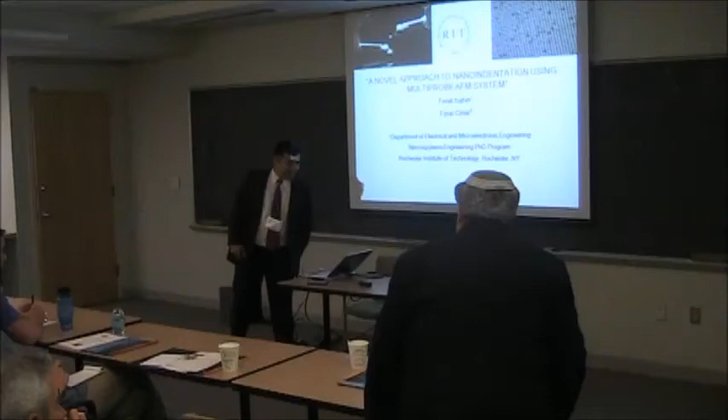The title says a novel approach to nanoindentation using a Multiprobe system. It's novel in the sense that we're using two probes to measure two different things: one being force, one being distance.

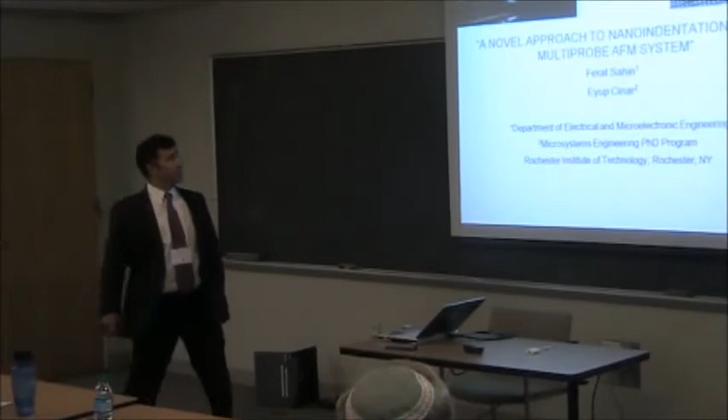I put those two pictures up there to show why we're doing this before I get into details. What you see is a bunch of cancer cells on top of PDMS pillars, which are 5 micron diameter and about 20 micron tall, so about an aspect ratio of 4. The reason the cancer cells are up there is that when they are in invasive mode, it's known that their traction forces are much higher than normal cells. So our idea is to measure, by looking at the dynamic change or how much they pull those pillars, the forces those cells create on the surface, and thus how invasive they are.

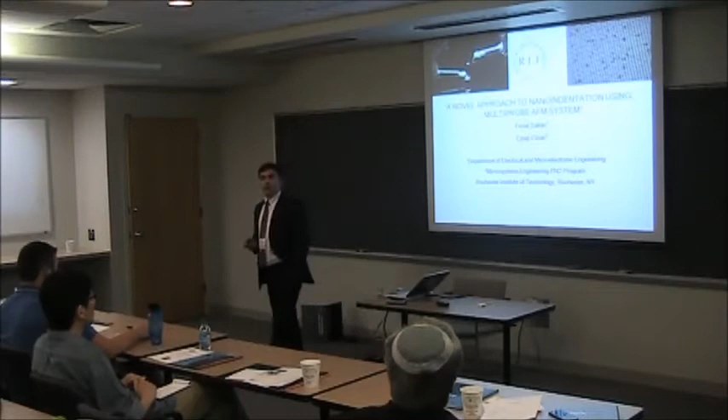That was the starting point for us to go into PDMS and figure out how we can quantify that force. On the left is the multiprobe system we have, the Multiview 4000. There is a tuning fork with a diamond indenter attached, and another probe which has a regular AFM probe touching the top of the diamond. What we do is move the diamond down and indent, and while this is fixed, we move the stage up and try to measure any change of the diamond, so we can get the X change or Z change, but in the force calculation, the X change.

So for that, we need to know the Young's modulus of the PDMS so that I can look at the deflection of the PDMS pillar and calculate the force. But the Young's modulus of PDMS in pillar format, with a high aspect ratio, may be, or in fact we believe will be, different than the bulk parameter Young's modulus. That's why we want to measure that through nanoindentation.

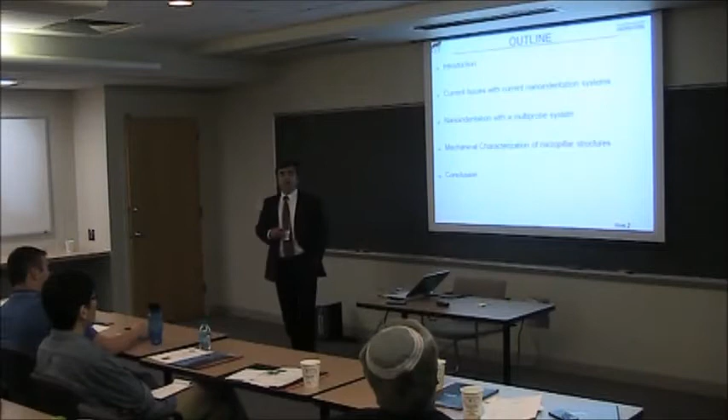Regular nanoindentation tools, as Aaron was saying, use AFM cantilevers. There are so many problems with them, so we had this tool in-house at RIT and wanted to make use of it so we could do a better characterization.

So, after that, Kit touched upon how AFM tips are not good for nanoindentation. And obviously there are models - this is the Oliver-Pharr model that he showed. What you do is indent on a material, pull it back slowly, and look at how much you can get in, which is the H max.

At that point, you measure the maximum force, and then slowly pull it back, and now you see the slope. The slope gives you the stiffness. Then at the end, if you have plastic deformation, you have HF, which through the force calculation will affect your Young's modulus.

That was the main idea we were pursuing. In Kit's case, he used PDMS as a standard component to measure the Young's modulus with different methods.

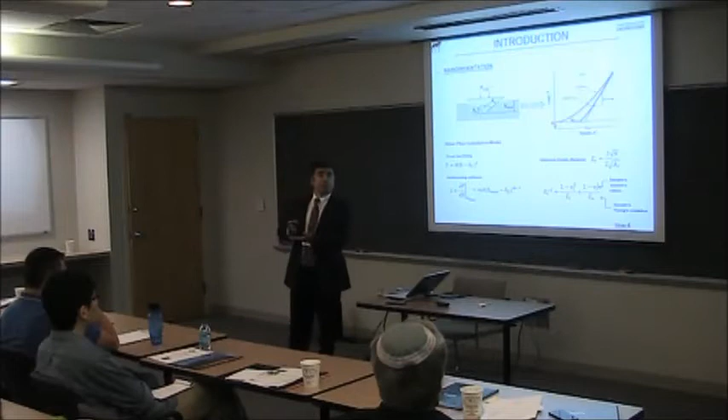In our case, PDMS is our only material, but we don't want to tune our system on PDMS alone. We want other materials with known Young's moduli, so the force calculations we get from the machine are more reasonable, correct, and dependable. Then we can apply that system to the PDMS.

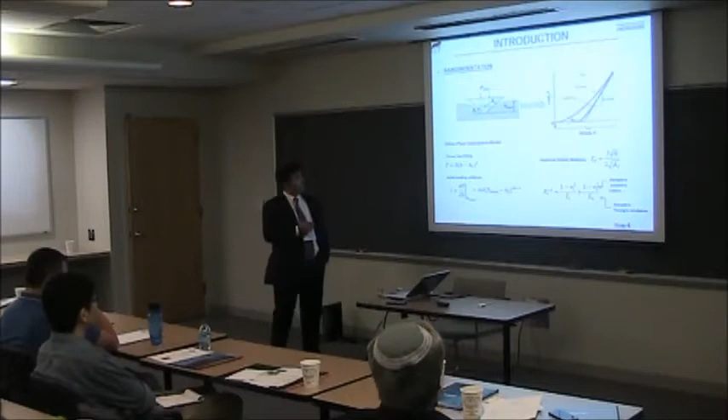Thus we did silicon, and then indented with the diamond probe on top of silicon, creating indentations and calculating that - so that's hard materials. Generally, Oliver-Pharr can be used for hard or soft materials, but it's mostly good if you have plastic deformation. If you have no plastic deformation, you're in the elastic regime.

There are known methods for that, as Kit mentioned in the morning. Why is nanoindentation being done these days? Mostly cytoindentation, a lot of tissue work - someone in the morning mentioned, actually Kit mentioned, mice, the aorta, yeah.

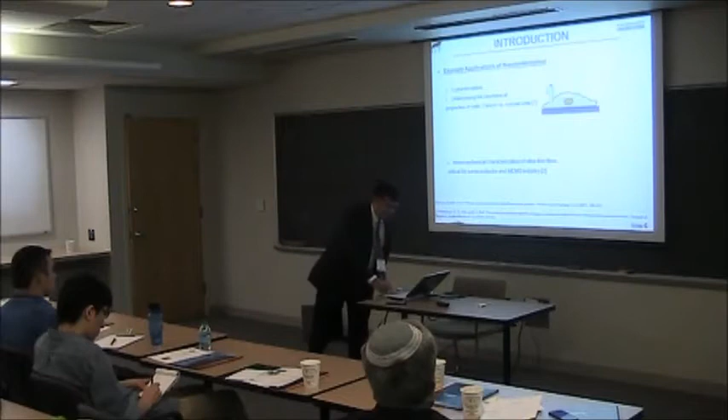Most biological materials, we don't know how stiff they are, we don't know their properties. But if we can measure their properties while healthy, and then measure when they are not healthy, this could become a detection method instead of just measuring the stiffness of the blood cell or the aorta. Also, thin films and ultra thin films are used a lot for nanoindentation for mechanical characterization.

Our earlier works in 2003 and 2004 were on bilayer cantilevers, where we had a very thin layer of silicon dioxide and also a very thin layer of aluminum on it, so we could create cantilevers where you can excite and change the curling.

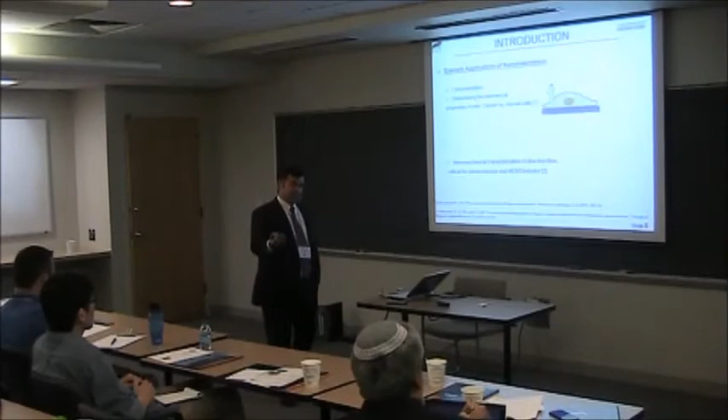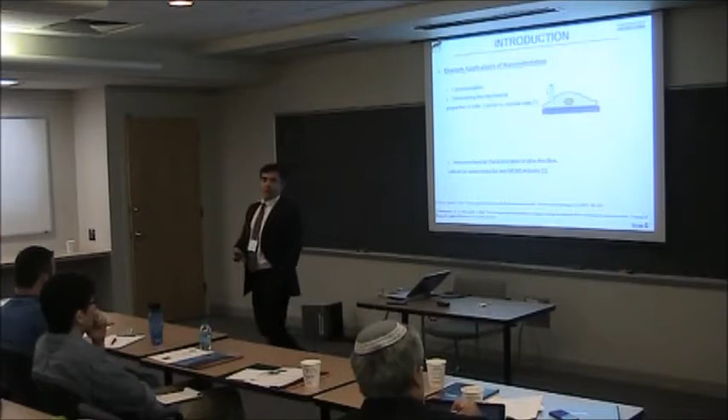Dislocations are very key in ultra-thin films. Because of dislocations, their Young's modulus is different, so you cannot just take the bulk modulus. That's why we actually work on the characterization of those thin films.

Briefly, as Aaron and Keith mentioned, there are AFM cantilevers used for nanoindentation. The main problem is snap-on and pull-off instabilities, where you touch and release and you get shaking. Obviously you have oscillation, bending errors if the AFM cantilever bends. Another problem is when you're pushing down, it's not just going down in that direction, it also moves in the other direction, which you don't necessarily count. So those are the things that are generally problematic in those probes.

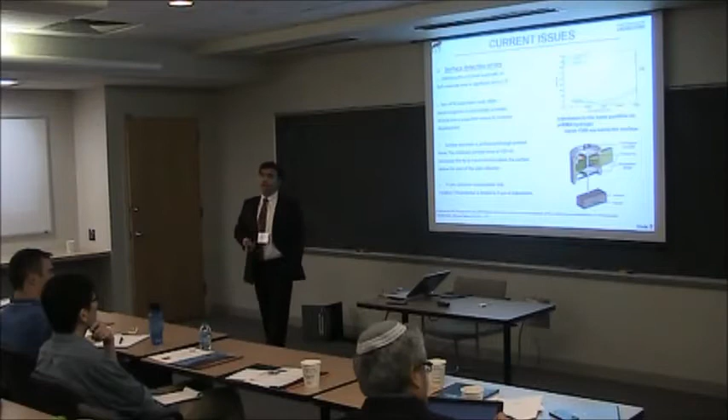There are non-AFM methods as well, where you have mechanisms to apply force and also measure the force. But then the problem with these is the contact point, the z equal to 0 point, is not clear. If it's not clear, then your experiments are not repeatable.

So we want to make sure our system is producing good force calculations through the indentation probe, and also getting good distance measurements from the AFM probe. For that, Aaron, Andre, Hisham and I all got together. We had the system set up on a sample. We put the probe here to see if the stage is moving correctly, and then we put the AFM probe on top, and we did indentation on silicon.

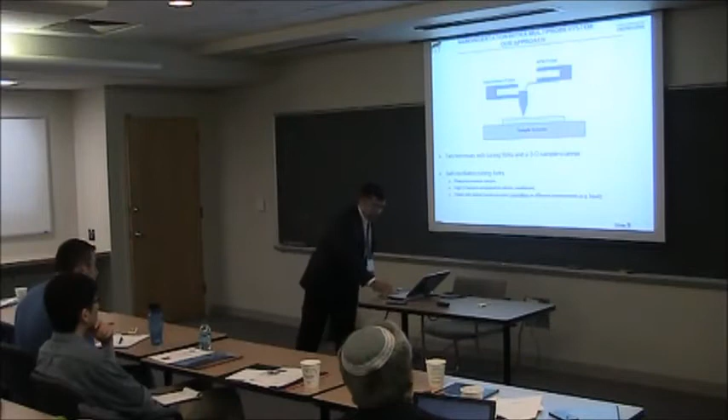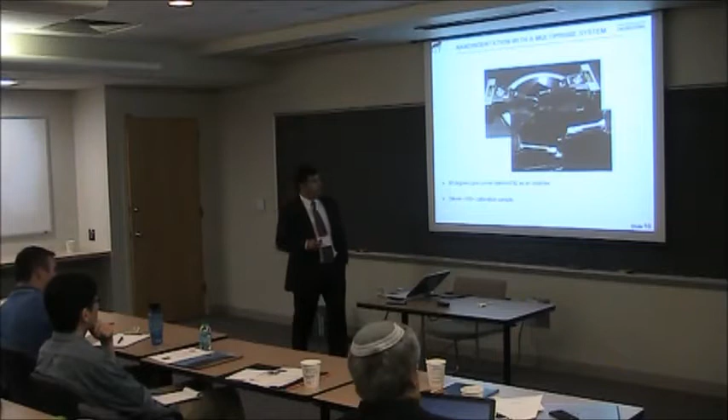We actually got good results initially on this system. It's hard to see, but this is the diamond probe, and that's the AFM probe on top of the diamond probe. We used silicon, which has the 100 orientation, and the diamond probe is a 90-degree cube corner diamond indenter. Now here's what we got from our initial measurements.

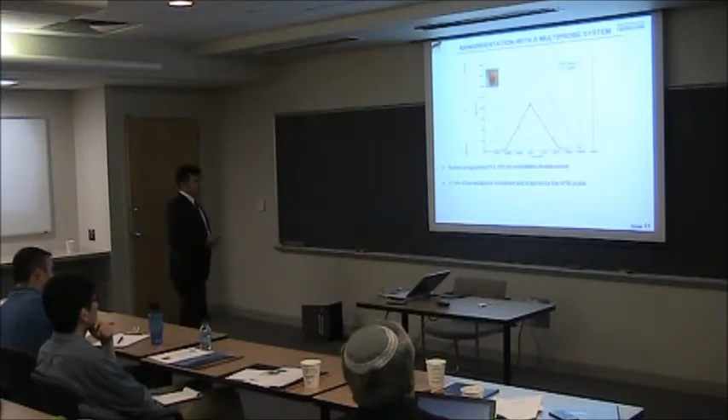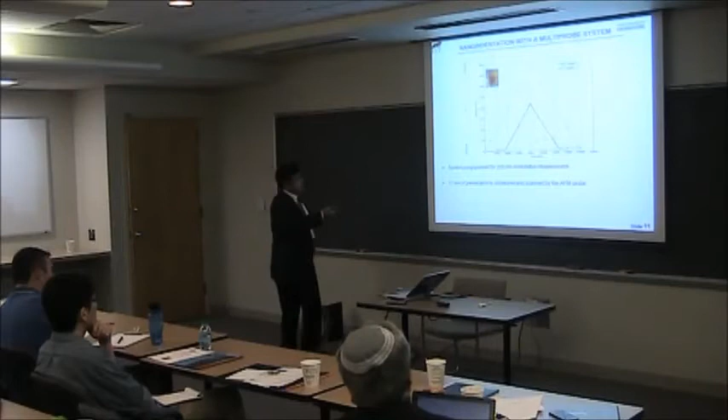This red line, it says 0 to 200, but I put these just to make sure. What happens is you go down first 200 nanometers, then go up until you touch the diamond, then push the diamond up about 200 nanometers. This is the stage value, so 0 to 400 nanometers. In the actual physical world, this is minus 200 nanometers to 200 nanometers.

The blue line, on the other hand, is the tip on top of the diamond, measuring the displacement. It's 0 here because the stage didn't touch the diamond yet, and as soon as it touches the diamond, it starts moving up, around 200, and then going down. If there is plastic deformation, that may not be 200, it would be less. Then once we go down and still measure, you can actually read some value for Hf before even scanning your indentation.

While doing the indentation on a known sample, if I can make sure that this force reading is accurate enough, then while measuring the actual displacement, I may use the Oliver-Pharr model a lot better, or other models, using the force value and the displacement, rather than just depending on whatever I read.

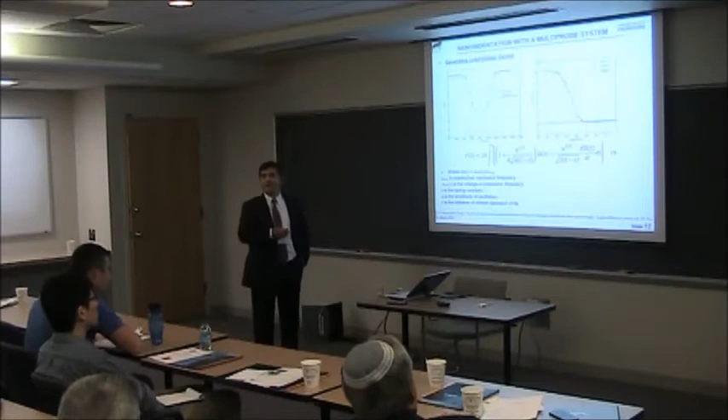Well, we were able to actually indent up to 10 nanometers, and the values we got are about 30 micronewton level, similar to the previous one, about 30 here, which is about 10 micron too. So we could only simulate this part because of computational limitations. Everything was so far so good.

Then we went to soft materials, which we really wanted to do because we want to find out how we can accurately measure the Young's modulus of PDMS. We couldn't use diamond because diamond would just go through the PDMS, so we wanted to use conical glass probes, just like Kit used, his was a 20 nanometer tip. Ours is 15 nanometers.

It's the same tip diameter as the diamond probe. We had issues getting the system stabilized because we were using the same setups we used for the diamond probe. We finally stabilized it and had some measurements, but the values we got weren't as good. We figured out that this tip was actually very sharp for our PDMS, almost like dipping in water and coming out, so it wasn't really detecting the PDMS.

So now we are in the process of hopefully getting new probes from Nanonics, almost spherical or conical but with a larger diameter, so that we can indent the PDMS, repeat the multi-probe measurements, and hopefully get the actual Young's modulus.

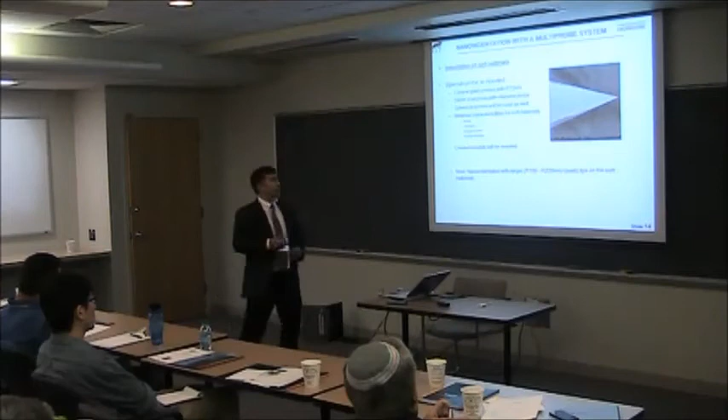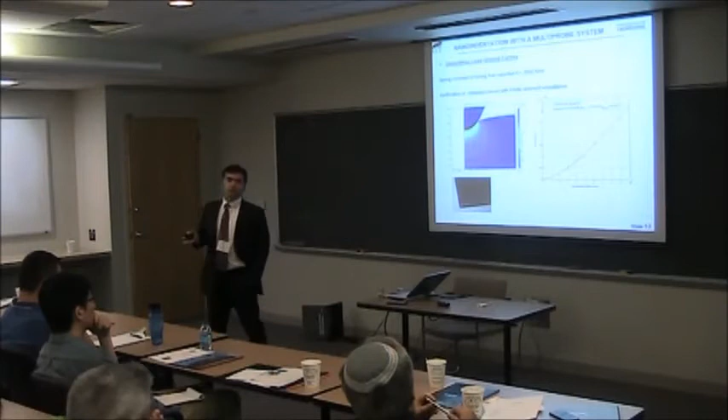So the spring constant was an issue, and we shared that with Nanonics. Now we're working to make sure this is right in the software as well. One last thing: we are getting a new tip or setup where the spring constant is higher, about 7,000. With this higher spring constant and the tuning forks, we're hoping that when we do nanoindentation on silicon, we'll get nicer graphs and nicer force readings.

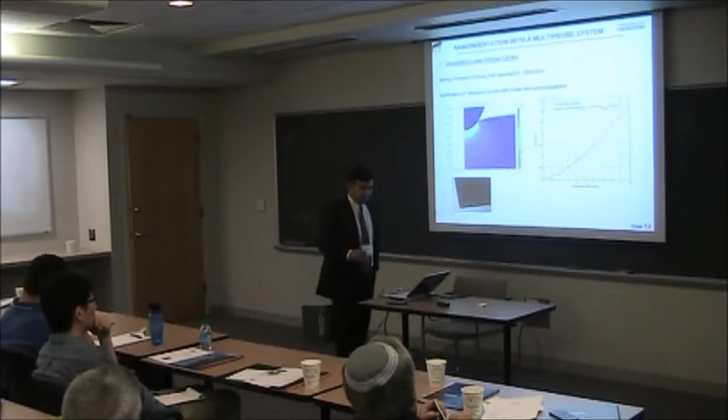Now, as I said, our goal is to come up with a device where you can actually grow cancer cells and look at their behavior to determine how invasive they are. We have some idea how we can see those changes chemically - we'll put some chemical in, and compare with and without it. We have biomedical engineering people in our group helping us on that.

What we do is simply create SU8 molds, then press PDMS onto them, creating these PDMS pillars. On top of the PDMS pillars we put fibronectin, which is the material where the cells get food so they can grow and move around. As they move around, they pull these pillars, and the displacement they create tells us the actual forces they generate during their motion.

That's the COMSOL simulation again for the pillar structure, the PDMS pillar structure we have, and we sort of know what force levels we'd like to see when the cell is pushing on this. But this changes based on what value of Young's modulus you enter into the software, so you cannot depend on the simulation all the time, nor on the tool all the time. You have to match them back and forth, hopefully they both support each other.

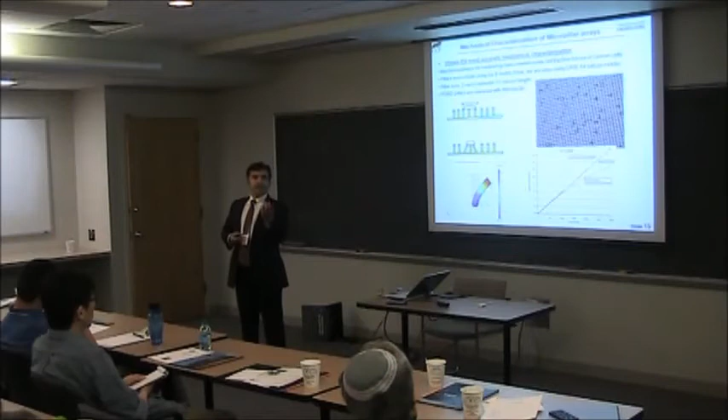In the literature right now we have 5 micron diameter, 20 micron tall pillars. In the literature there are also 3 micron diameter and 9 micron tall ones, but they made those using deep reactive ion etching, which we now have - we are making them too. The idea is, if you have the pillars dense enough, you can assume the cell is actually moving on a flat surface. That's the basic idea.

Now, while a lot of people are doing similar work, they don't want to give up AFM tips, which basically do the same thing. There are papers where you use an AFM tip with an angle, come to the pillar, pull it a little bit, look at it from the camera, measure how much the change is in X, and based on the height you can guess the curvature. Using the curvature, you can backtrack the Young's modulus. Obviously this has issues in terms of pulling forces - you don't know exactly how much force you're applying, because the AFM tool is designed for downward push, not pull.

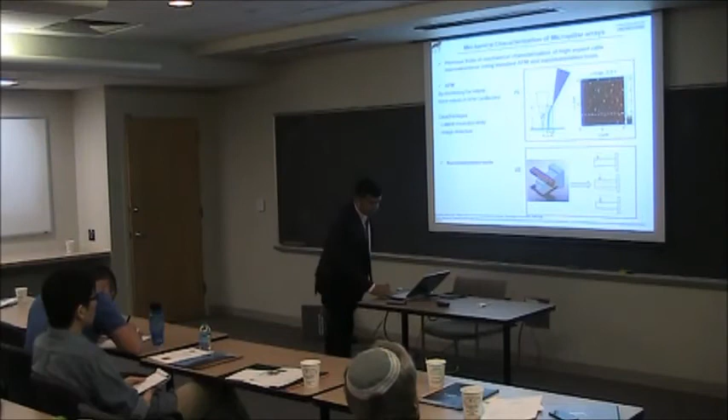And there are other methods where you actually turn the pillar 90 degrees and then push on top, which also has some issues regarding deformations. Because of these limitations, we are still pushing to use Nanonics tools so we can achieve what we want regarding measuring the Young's modulus of PDMS. Now, this was a discussion Aaron would remember from one of the early Skype calls, because we said, well, we don't have a thin film of PDMS - we have arrays of pillars.

I want to measure the Young's modulus of that specific pillar structure so I can measure the deflection the cells create, and then calculate the forces for those pillar sets. So we were talking about pushing the pillar from one side and then coming with a second probe and measuring the curvature, which would give the most accurate readings if it's possible, if we can make it.

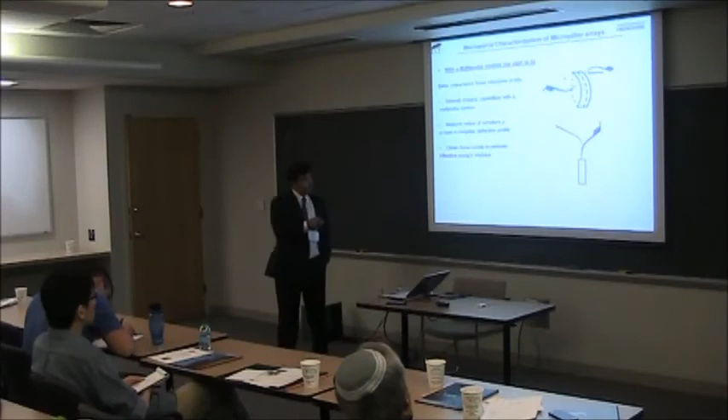Of course, there are limitations. First, the force you are applying has to be known with good precision. Second, this is a soft material, and the tip touching it means you have to detect the zero point very precisely. As Dalia mentioned today, if you have high frequencies, you may not get good readings.

So this is something we are waiting to see how it will work, but we would like to do this too. Can we actually take a probe, put it on top of the pillar, push it down for a very small indentation, and then measure with the second probe and do the same calculations, instead of using a thin film or film structure PDMS.

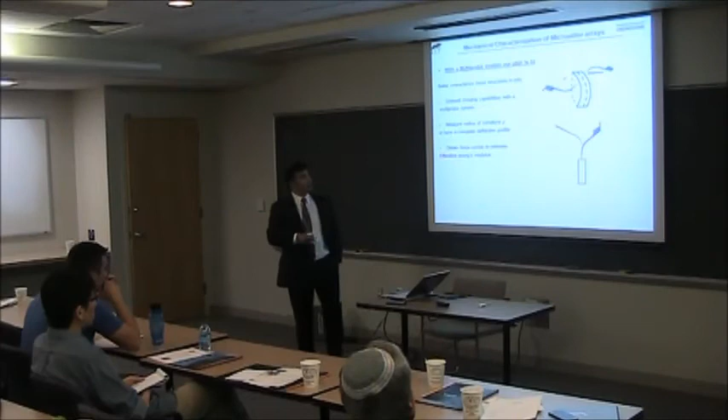So this is basically our next step after we complete the silicon nanoindentation and have the forces completely clean, with ultra-sensitive resolution to measure very small, piconewton level forces. We are hoping to do the same thing with spherical probes in PDMS, just thin films first, and then move to 2D and 3D mechanical characteristics of PDMS.

Because in biological cell research, when you're looking at the dynamic behavior of the cell, you don't want to just look at 2D behavior, because cancer cells don't move in 2D in your system, they move in 3D. So maybe not now, but later on we would like to grow the cells inside the pillar forest, look at the changes they create in the pillars, and measure how much force they apply in different directions.

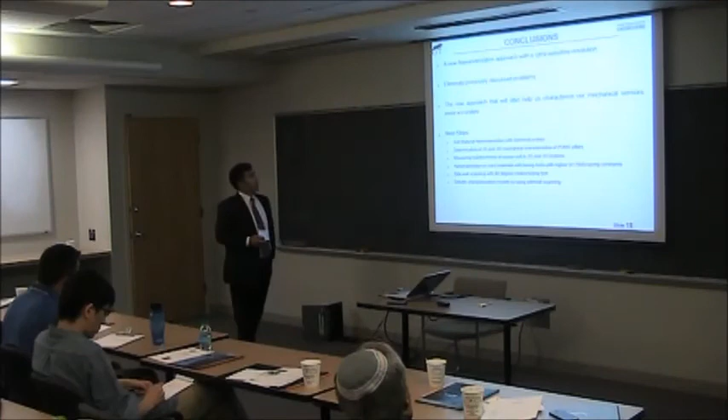I mentioned the high spring constant. Hopefully that's going to be our next step, hopefully next week we'll arrive and try that. The high spring constant is not necessarily for the lateral force, right? Yeah, because that's going to be soft.

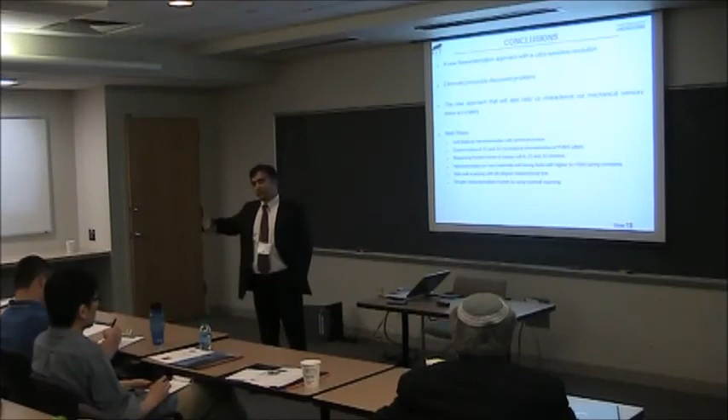So what we will try on silicon first, and then hopefully we'll do the 90-degree apparatus and be able to push from the side, or measure from the side and get the curvature. If we can manage that, it opens up a lot of other research opportunities. Sidewall imaging is one of the important things people are working on, not just for biological purposes, even the IC guys are very interested in that.

Thank you so much for inviting us, and hopefully we'll report good results and see it in conferences, which Ayub is going to. The conference is August 28th in Michigan, IEEE Nano, he's going to present the Michigan findings.